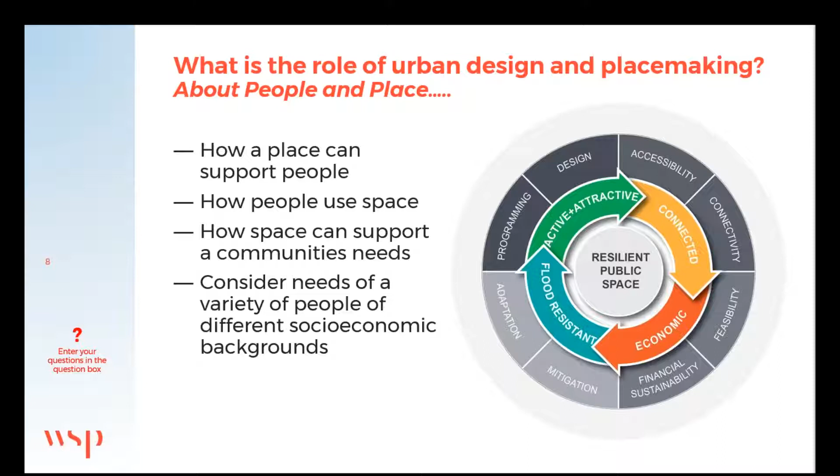So we've created this diagram to really show how everything's interconnected. We take a very holistic approach in our work, and we really look at how what may typically be thought of as a standalone infrastructure investment can really be leveraged to support a community. So once again, we really look at how we can integrate what may be engineering strategies for resiliency into community through a very holistic approach. We collaborate with other disciplines all the time.

And really the idea is to really provide wraparound solutions that work together, right? So it's not just about a resiliency strategy, it's about how that strategy creates a great place where people want to live, work, and play, which is a little bit of an overused term. But I use that because it's so important, right? It really is. People want to be in a place they really want to be, right?

And by doing this, you can really add significant value for clients by taking what might have been a standalone investment and having that do so much more, i.e. create a community, create a place, really support a destination, and other goals that may not have been achieved if you thought about resiliency alone as a standalone topic subject.

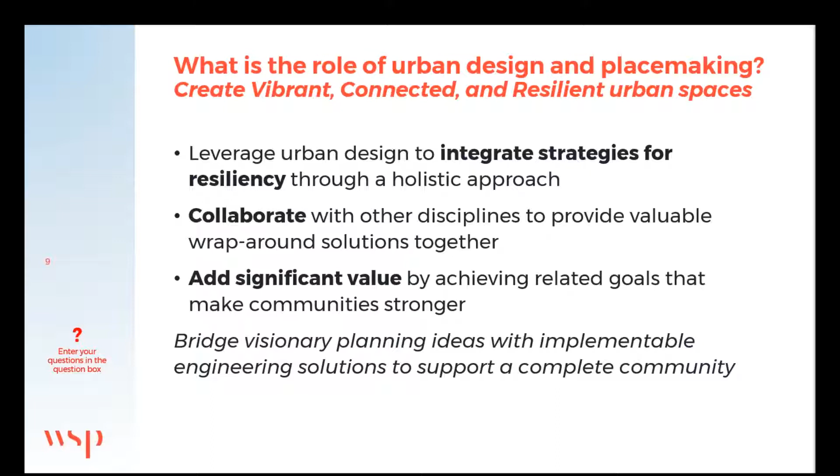So I'm going to talk about a few projects that we've really applied this to. This first one is a project in California, Los Angeles River Downtown Design Dialogue. And this is really about a strategy that at its heart is about flood control, but our approach really was about how you get community access to a natural resource. In this case, the Los Angeles River in Southern California.

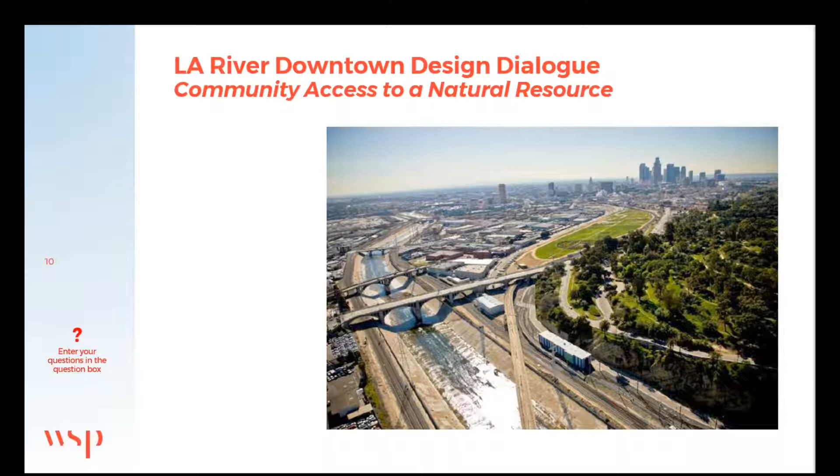So WSP was invited by the City of Los Angeles, along with a half dozen other design firms, to really create a vision for the river.

You know, the backstory here is that the Los Angeles River was this amazing resource. The early Pueblos were founded where there was water. This is one of those locations. The earliest settlement in Los Angeles is right nearby this.

But over the years, there was disastrous flooding in the 1930s. The United States Army Corps of Engineers channelized the river, and that's how you get the iconic LA River that we all know today—this gigantic flood channel and industrial basin.

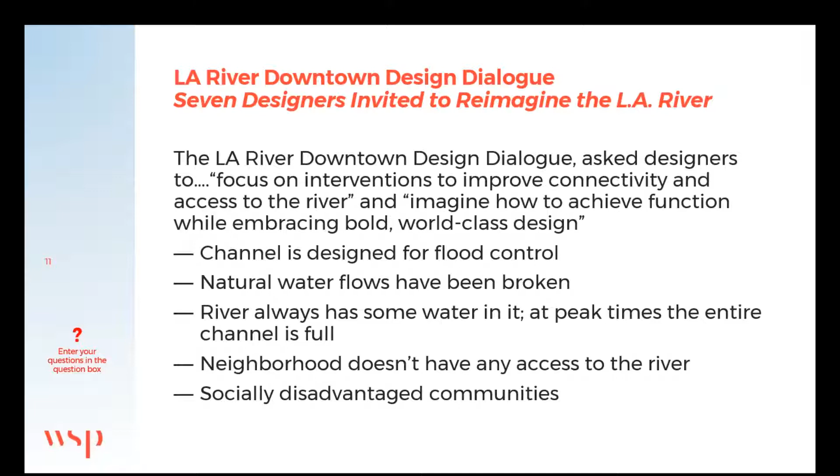And it's really designed right now for flood control. The natural flows have been broken, whereas there was groundwater recharge in what's a fairly arid part of the world. The intent was really just that the water gets to the sea as quickly as possible. So those natural flows were broken, and the community does not have access to the river.

So at the heart of it is our approach for the Los Angeles River, but because we think about this in a more integrated, wider approach, we also thought about other assets nearby that could benefit from this new river access. One of them is the State Historic Park, which was just renovated by the state, and a new ball field just across the river, which is actually a ball field over flood control infrastructure.

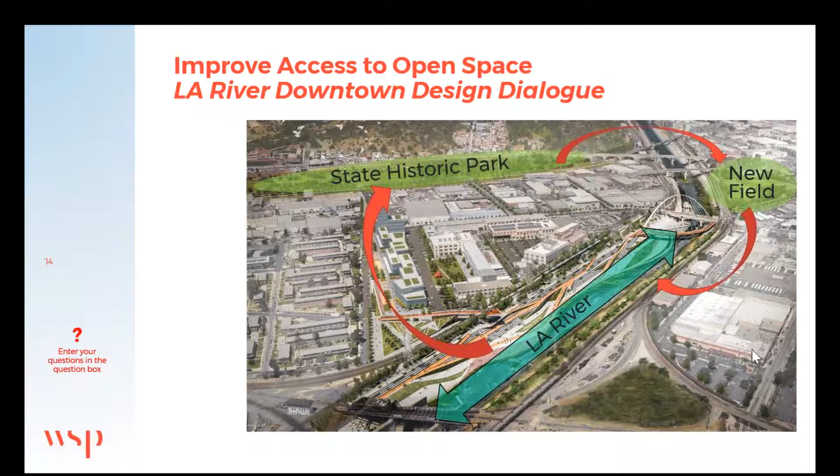So we took an approach that was really about connecting these assets. Green streets incorporated rainwater strategies and incorporated walkability. And so it really was about taking this asset and connecting it, realizing that it doesn't stand alone.

This is actually a fairly low-income community, with some real socioeconomic challenges, so this was really a much needed resource. And then, of course, because Southern California has an acute shortage of housing, we added housing as well, because once again, it's not about a specific investment, but it's about getting to a complete community and what that place is like.

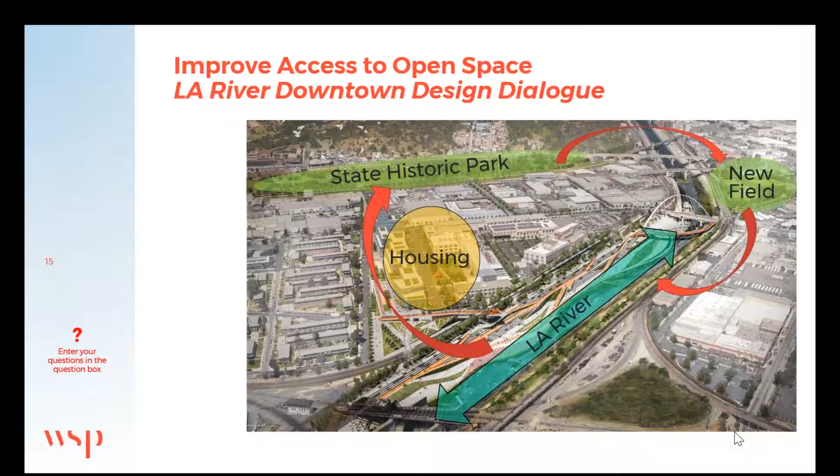So this is what that vision really looks like—this is in the river. We've taken what is a water channel that always has some water in it, but sometimes this whole channel is filled. So we understood how the water flows can impact this, the scouring action of the water, but also recognized that most of the time this is not really needed for flood control, and the community can have access to it. So that's just one strategy—once again, primarily a flood control initiative, but about how we can get people to that asset and really leverage that investment in engineering costs.

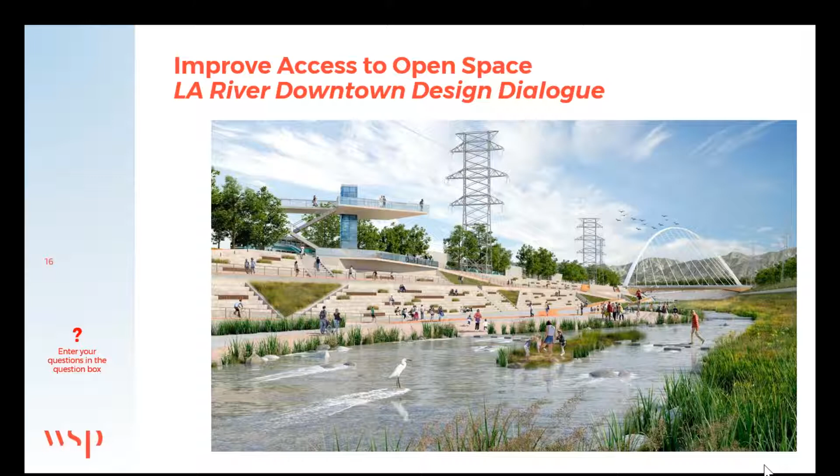So I'm going to pass it to Miranda, who's going to talk a little bit about a project in Bridgeport, Connecticut. Thank you, John.

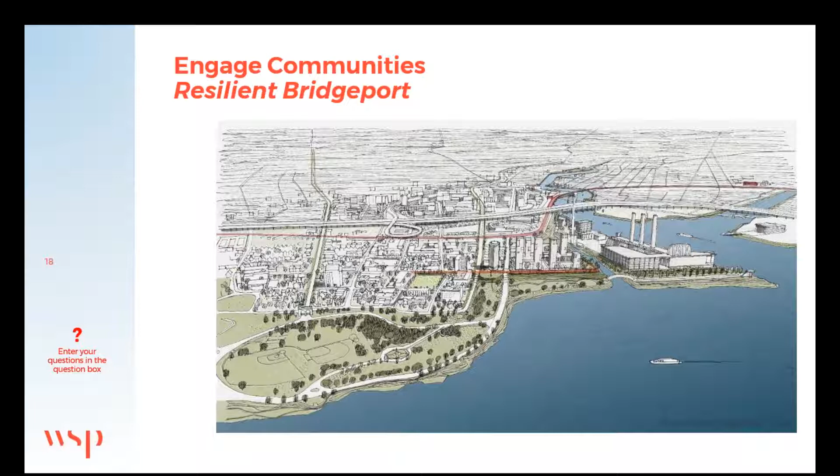So a little bit of background: Bridgeport is a historical seaport city about 60 miles northeast of New York. Sitting at the junction of the Pequonnock River and Long Island Sound, the city is facing significant environmental challenges, especially flood risks.

So Resilient Bridgeport is a federally funded project, part of the response to the extensive damage caused by Hurricane Sandy. It is focused on the South End community, which is the most vulnerable coastal neighborhood in Bridgeport.

The community, the South End, is home to over 6,000 residents in historical houses. Many of them are low-income and minority population. There is also the University of Bridgeport campus, the regional power facilities on the east, and an Olmsted-designed historical park, Seaside Park, on its south.

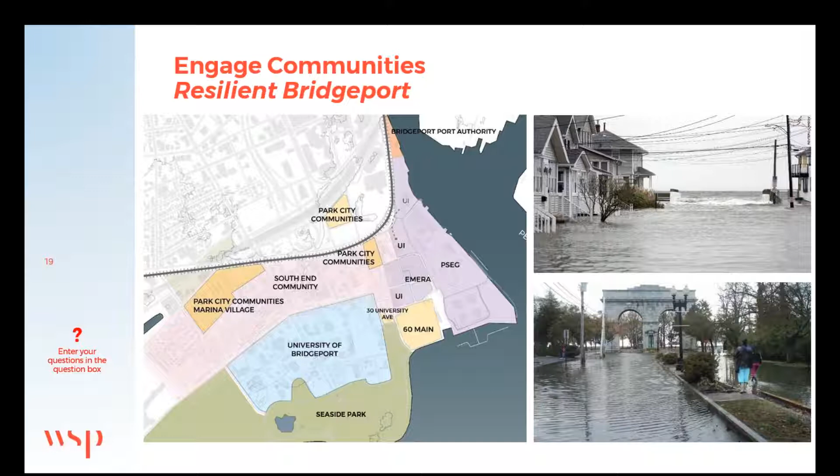The WSP team developed a comprehensive resiliency strategy and also pilot projects to implement flood risk reduction measures on the east side of the South End neighborhood. The key component of it is a flood protection barrier—a flood wall, in simple words—that is up to 12 feet in elevation through the middle of the neighborhood.

And through the project, the main tasks we completed include the design alternative analysis, the engineering design solutions, environmental review, and also a robust public engagement process.

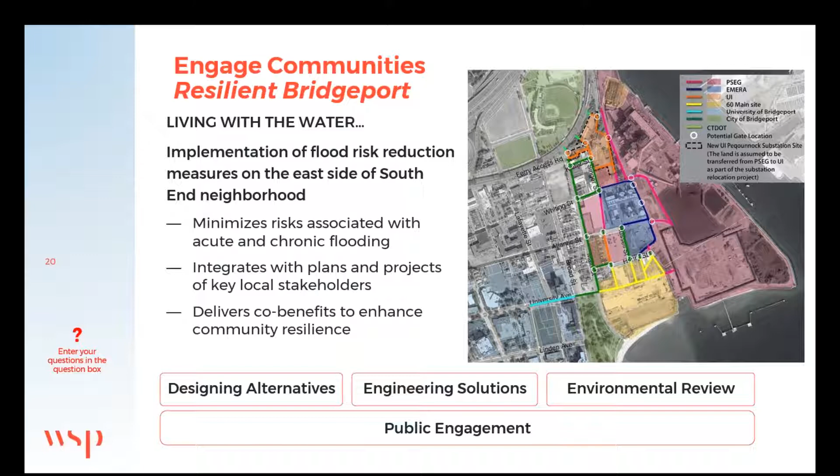So the community members and stakeholders directly affected by the flood risks are the people the project is designed to serve, so their input is really key to the success of the project. We maintained ongoing public involvement throughout the process to engage community members at every step of the study. Public events included open houses, design workshops, site tours, lectures, discussions, and also online engagement.

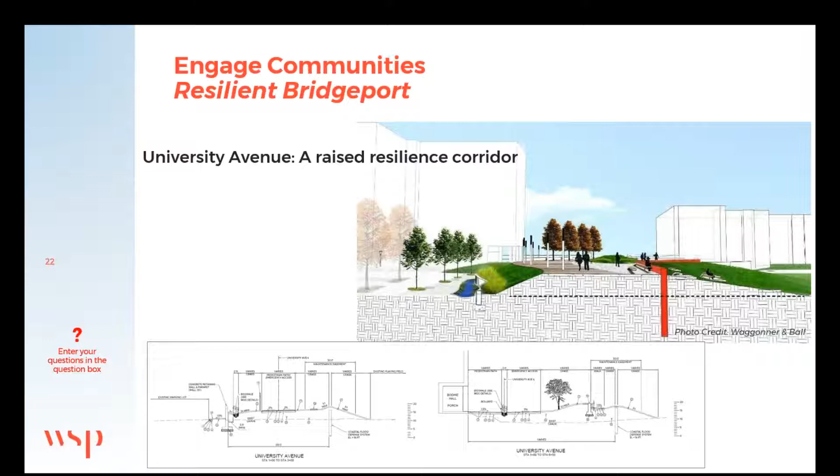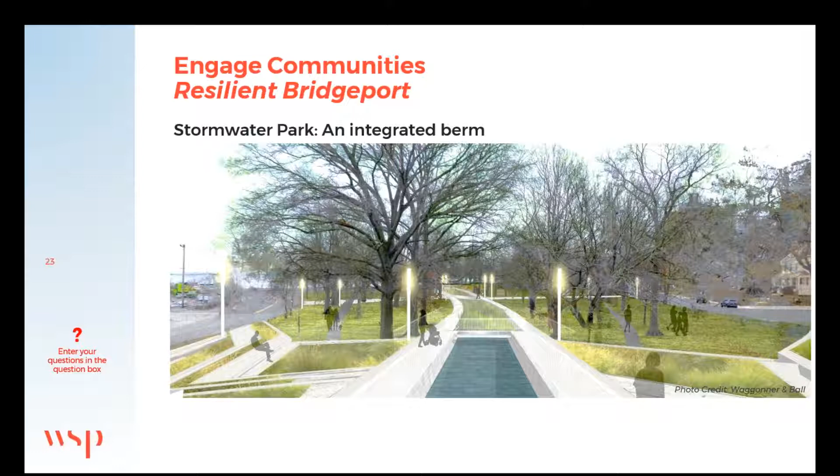So the takeaway from this project is really to leverage infrastructure investments to address multiple goals and community needs. To do that, it's important to engage the community through every step of the process. Through the integrated landscape approach, the Bridgeport project goes beyond just flood protection; it also provides improved connectivity, enhanced redevelopment opportunities, and attractive new public landscape. This will ultimately help redefine the city's relationship with water.

So I'll turn back to John. Thanks, Miranda. Our last project is about replacing highway infrastructure, in Miami, Florida. This is a rebuild of a 1950s highway that connects I-95, the main north-south corridor on the East Coast, to Miami Beach. It goes through downtown Miami, across Biscayne Bay, and touches down in Miami Beach.

So you can see this is the highway just after it was constructed, and during construction. It's really interesting because we often talk about highways severing communities, and as you can see, the size of this cloverleaf did a lot more than just sever a community. So that's the history, that's the context. The replacement for the I-395 highway has really been decades in the planning and the making.

Our involvement was really a design workshop charrette process to ensure that the community's and the city's vision for this park, being developed under the elevated highway, came through. It was a private sector development partnership with the city, so they wanted to make sure that this new open space under the new elevated highway really reflected the city's needs and the community's needs.

The highway goes through a rapidly redeveloping neighborhood. We were building on a history of a lot of past planning, and also overcoming the negativity of this highway that had literally plowed through this very historic neighborhood. This is the existing highway on the left, the proposed highway on the right, and really the context here was that the new highway was much higher than the old highway and much airier.

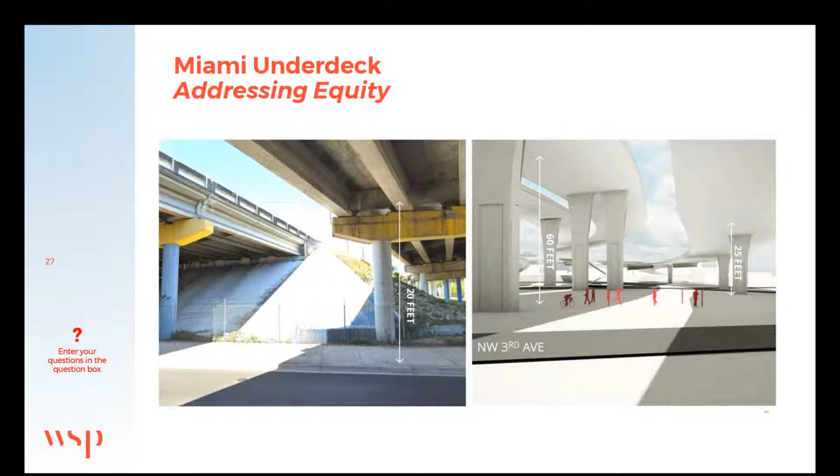So there was an opportunity for open space and a very different type of condition than currently exists under the highway. The other thing too is Miami, Florida is a very hot, humid climate, so actually during the summer months, shade is quite desirable. So there are actually some good reasons for having the park under the highway.

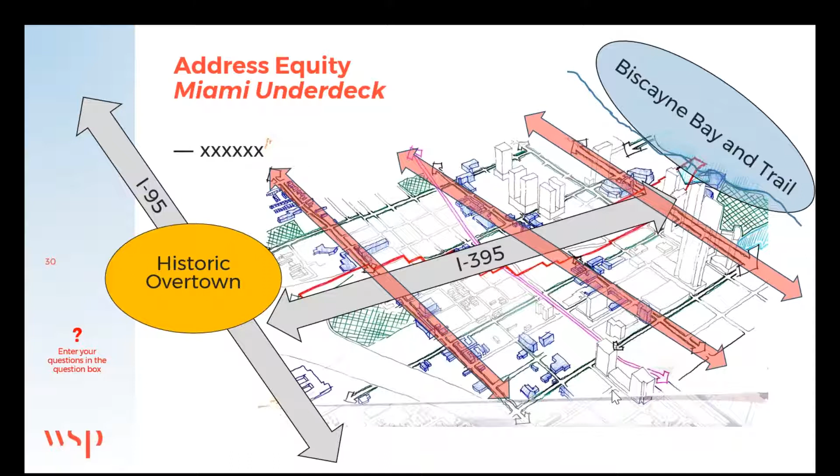So really, it started very much about a north-south solution. But then as we got into the planning, we realized our planning zone had stopped just short of the Overtown neighborhood. Our original study area was just shy of it. So we realized the north-south connections shown here in red were still very important, but there was this overlay of east-west through-the-park connectivity that was so important.

By going just a little further than our original study area, we looked at strategies to get up and over I-95 to connect to the historic Overtown neighborhood, giving those people access not just to this new under-highway deck park, but just the short 1.5 to 2 miles east to Biscayne Bay and the trail network being built along it. So really it was about access to neighborhood open space, but also this larger connectivity story.

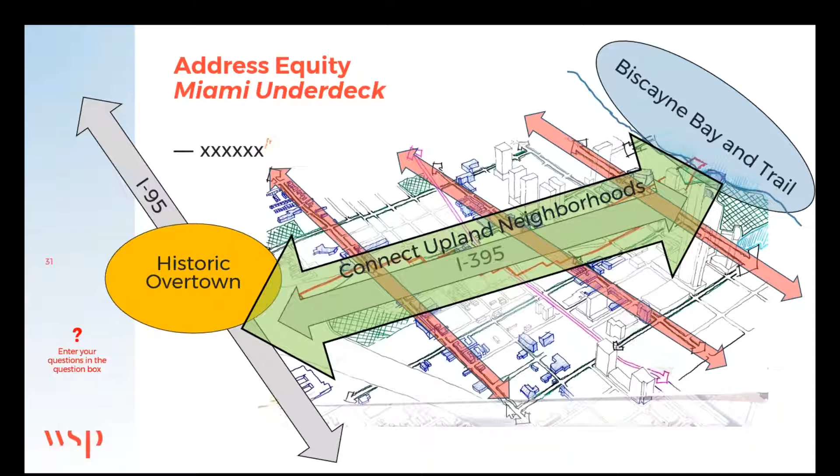So the real takeaway here is that you can integrate public space with transportation infrastructure. It's not easy. The takeaway from a planning perspective is that you need to really keep an open mind.

Our task was really to connect north-south on either side of the highway, and through the planning and workshop process we learned that the east-west connection was just as important, connecting the existing historic neighborhoods to the waterfront. So the takeaway is that infrastructure investments can address both environmental and community needs, but you really need to think about that and be open-minded.

I think all the processes we use are intended to bring disciplines together, apply a holistic approach that integrates multiple solutions or addresses multiple challenges with one solution. But really, I think the takeaway here is to have an open mind.

Part of our process is really the workshop process with our peers, but it's also a workshop process with the community and stakeholders. It's about how those really inform our planning, our design, in ways we don't necessarily intend. I think this is a really good example, and so is Bridgeport, of a project going not necessarily where you thought it was going when you first started it.

So really, that's some of our examples, that's our process, that's how we really integrate infrastructure and resilient strategies with a resilient community.